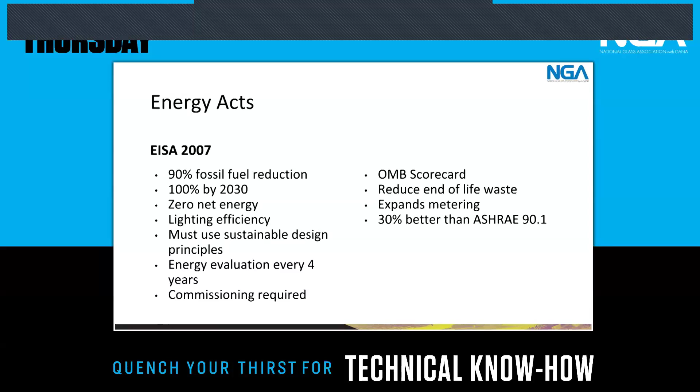The other one that we have out there, fairly new, is the Energy Act of 2020. It goes on to promote carbon management, looking at how we do both operational and embodied carbon. It expands that definition of zero net energy. We have a requirement for using performance contracting. Everyone here familiar with ESPCs, Energy Service Performance Contracts?

Energy service performance contracts is where basically an owner who doesn't have enough money to renovate their building or upgrade it can go out to the marketplace, and there are companies out there that will loan the money to the government or to the owner. They come in and look at all the possible retrofits that can be done, usually centered around energy and water efficiency. They say, okay, we'll spend $20 million renovating your building, we think we're going to save that in 15 years. You pay us back this plus a fee over those 15 years, and we guarantee your energy efficiency will be this. So they're essentially getting paid back by the efficiency they've brought to the building.

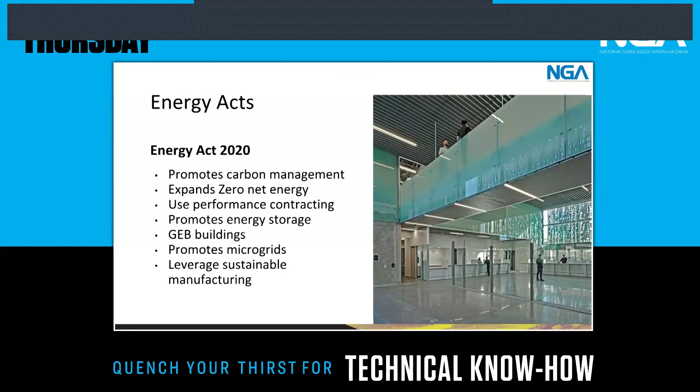So that's an interesting one we've seen happening more: using microgrids. So we're looking at the ability of our buildings to start to stand alone and be more resilient, as opposed to having to be part of these bigger electrical grids. And then really starting to leverage more sustainable manufacturing - how are these products being made and being delivered to the site?

So out of this concept of having to design to sustainable design principles came the sustainable guiding principles. And so these principles start to lay out that next layer of requirements that are put onto federal buildings. The most important, as an architect, for me at least, is employing these integrated design principles.

It was a great point earlier today that a lot of times people involved with the facade aren't brought to the table in time, and decisions are being made about the facade that then affect the overall energy efficiency of the building. This idea of integrated design brings more of those people to the table at the right time so that they can bring those ideas together, be bold in their thinking, and make those decisions up front, as opposed to later when the cost potentially goes up.

Other things you've probably recognized: energy performance, water conservation, indoor environment, the environmental impact of materials, and building resiliency. For the federal government, you obviously want most of those federal buildings to be highly resilient, because if you're in an area that might have something happen, like a wildfire or a hurricane or a flood, you generally want FEMA up and running so that they can then distribute the money and get help where it needs to go. So resiliency is a very important aspect of this.

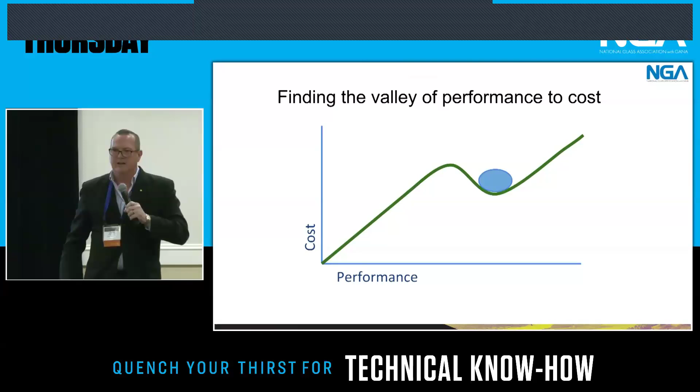Obviously, improving the building performance, health and comfort of the occupants. And then, so this is where integrated design comes in. This is where I want to build up from your talk earlier today, Helen - this idea of cost and performance.

She was absolutely right. Generally, when you raise performance, it generally is raising cost. But you do get to a magical point if you raise the performance enough and you have all of these integrated systems working with each other, that your cost actually starts to go down. Because you've taken a high performance facade and integrated it with the HVAC system, now the HVAC system doesn't have to be as big or as bold. I can reduce the cost of my HVAC system. I've integrated it with my lighting, so I don't need as many lights or as many fancy controls throughout the building. All of a sudden that cost starts to go down, because now I'm taking stuff out that I don't need anymore since my performance has gotten me up higher. This is where we try to live in the federal government, where that blue circle is - our costs are lower, but our performance is higher. Eventually, you do get to a point where you're leading edge, trying out some crazy new stuff, and that cost starts shooting back up again. But we're trying to live in that valley right there.

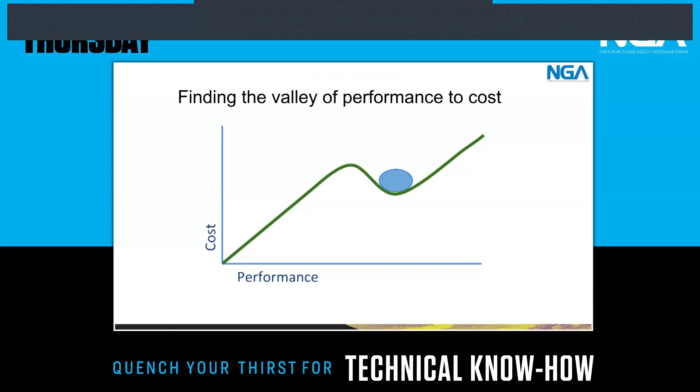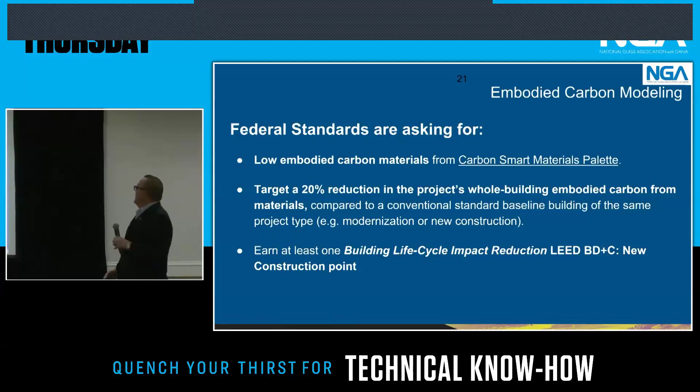Some of the aspects I want to make sure y'all understand - I know yesterday there was a lot of talk on embodied carbon. We require that our projects look at doing a 20% reduction in embodied carbon. So we do a whole analysis of the building - what are the materials being specified, how are they used, what is their footprint, and can we reduce that footprint by 20%?

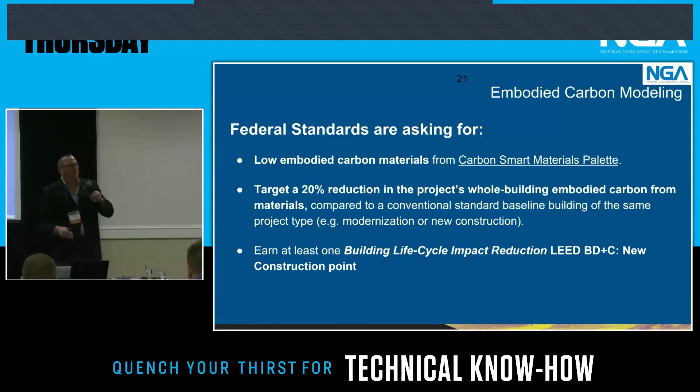Look at simple tools that are out there, like carbon smart material palettes. If you've heard of Architecture 2030, this is a shoot-off of that. It's basically saying, here are some real simple materials to take a look at and make consideration of - glass is in there. And then looking at using tools that are already out there, like the LEED rating system and some of the points they have in relationship to that.

I'll also note, I meant to put a picture in and I didn't - Edith Green Wendell Wyatt is in Portland, Oregon, and it's a phenomenal facade story. This was a brutalist style concrete building, thick concrete walls, strip windows, not a very nice place to work. They stripped off that concrete and put on a beautiful facade that's different on all four sides because it has to respond to the sun on all four of those sides. And in the process, getting rid of that concrete over 18 stories added 1.5 feet of rentable square footage around the entire perimeter of the building.

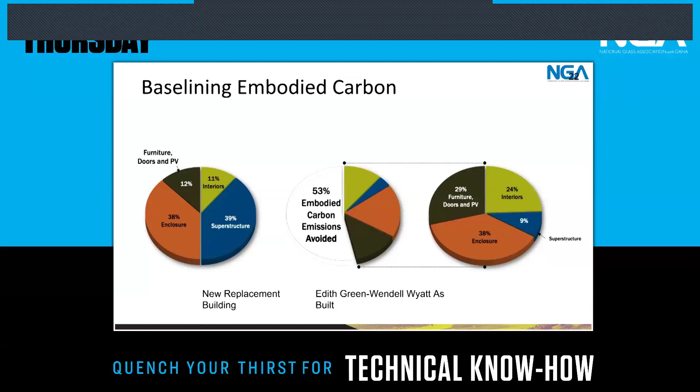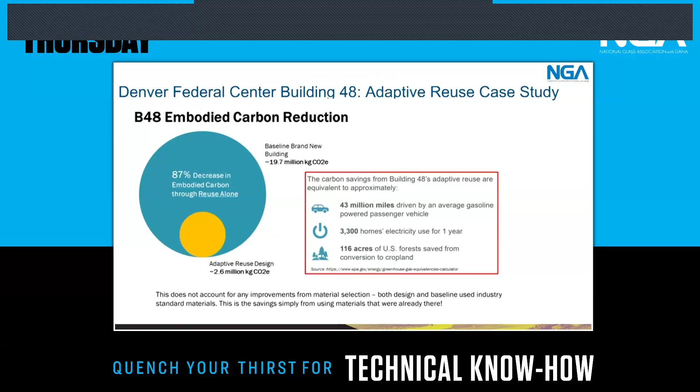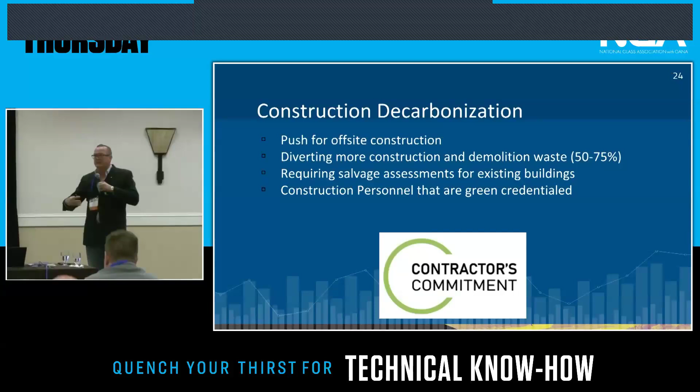Another aspect we're starting to see pick up in the industry is this idea of construction decarbonization. I bring this up for a couple items - mainly starting to look at pushing construction off-site, having more construction done in factories where any waste can then automatically be reused or salvaged or taken care of. Making sure the quality of the work is the highest quality we can expect, that the glazers are actually putting all of the seals in the right way. Then delivering it to the site just in time so it can be craned up where it needs to go, be attached and go forward.

We're doing also a lot more from our construction and demolition waste, and also salvage assessment. We're recognizing, we're talking to more glass companies that say, hey, you're taking off 1 million square feet of glass when you're doing this renovation - we'd really like that glass back so that we can then lower our embodied carbon footprint, crush it up and melt it and make new glass with it. So those sort of stories help to lower that overall embodied carbon footprint, which we're really excited about.

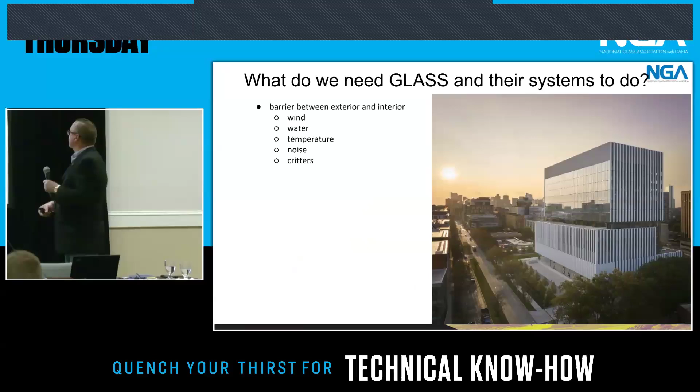So glazing requirements within all of this - we're asking glass to do a lot for us. This is sort of what we see in various facility standards out there. Some of this is obviously the basic requirement of what glass does, right? It keeps the wind from blowing inside and it keeps the water out, hopefully. It makes sure that temperature is regulated.

Piece here I want to take note of is life cycle costing. We heard a little bit of people talking about this earlier today. We're supposed to do life cycle costing on our buildings and projects. And I think one of the things I was thinking about - no one understands U value in the public. They understand R value because that's what they're hit with, right? So a window that's an R3 or 4, maybe a little better if you're really, really good, is really hard to justify when you're up against an opaque wall with an R value of 40. So we have to start asking our architects and mechanical engineers and whoever, is it really appropriate to have that window there? Because that's costing me money - that's costing heating and cooling, and it's generally more expensive than the wall that it's next to.

So we have to ask ourselves, is that really the best use of that glass and that glazing system? Is it really doing something for the building there? Life cycle costing - I push back on a lot of architects because they love doing repetition of windows, and all of a sudden I've got a window in a closet which I don't need, or I've got one in a restroom that they then have to black out. I was like, you're just spending money. Let's be a little smarter about this.

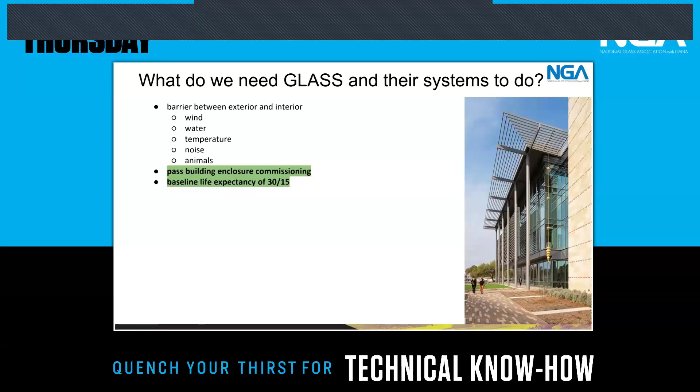We're also asking glass to deal with daylight. In a lot of cases we've gotten away from the concept that daylight just means a window someone can look out. I've got too many federal buildings where people installed umbrellas over their desks because the sun's beating down on their computer. They installed this big window and expected the agency to fund blinds to block out the bright glare coming in. So we've changed that—it's now all part of the designer's responsibility. They have to think about what they want happening on this surface, and how to design that facade with a blind, louver, or sunshade system. They have freedom to do that, but it has to be part of their package now. They can't separate it out and push it on the agency anymore.

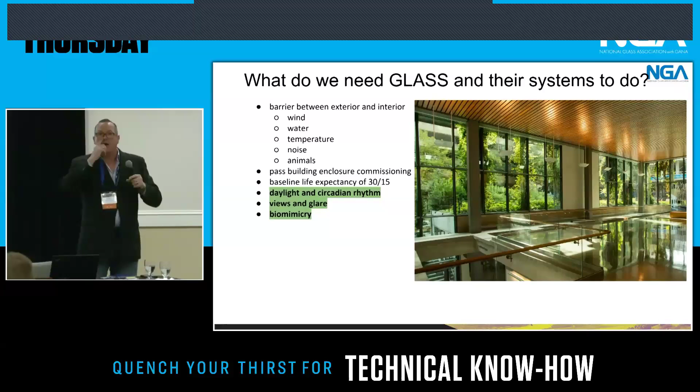Circadian rhythm—that's really a lighting thing, except it's not. It's all part of that daylighting aspect. We're now installing and working with labs to put in lights that change color throughout the day, to regulate people's circadian rhythms so they sleep better and are more awake at work. That takes daylighting to be a part of it as well. When the lighting and the facade work together to bring in this idea of circadian rhythm, we have a much better solution.

Biomimicry—this is actually an interior shot of the Edith Green Wendell Wyatt building. It has vines and trees growing up the outside of the building. It's pretty cool to see, and people really like this sense of biomimicry in this building.

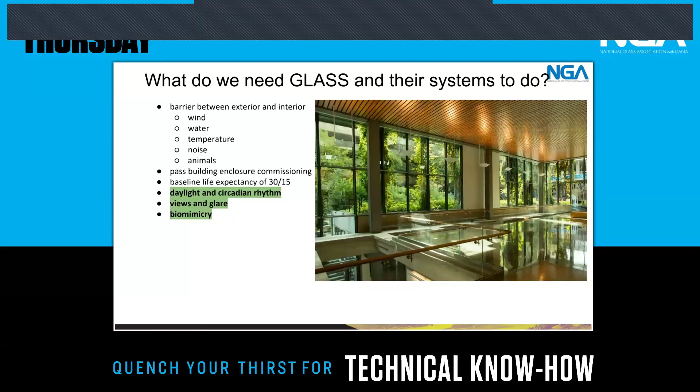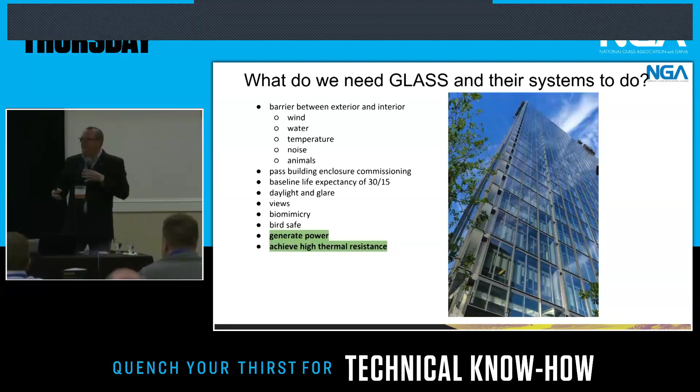We're also looking to potentially generate power. Is that an option? There's lots of new materials out there. On a 27-story building, it's really difficult to get all the solar panels you need on the roof, so where else can we integrate them? And then looking to achieve that high thermal resistance—really starting to understand the U-value of those materials. What's the new thing out there we can take advantage of?

There are programs for both military, Department of Energy, and GSA about new materials, helping them bridge that technological valley of death—where you invent a product but haven't gotten it all worked out and tested yet, it's not out on the marketplace yet. So let's use the federal inventory to install some of this. Let the national labs do extensive measurement and verification to see if it actually works, and write a report that, if it does work, you can use to get yourself across that valley of death. Hoping to bring more materials to the marketplace. I've talked with several of you—some are already in that program. Really excited to see how that works out for y'all.

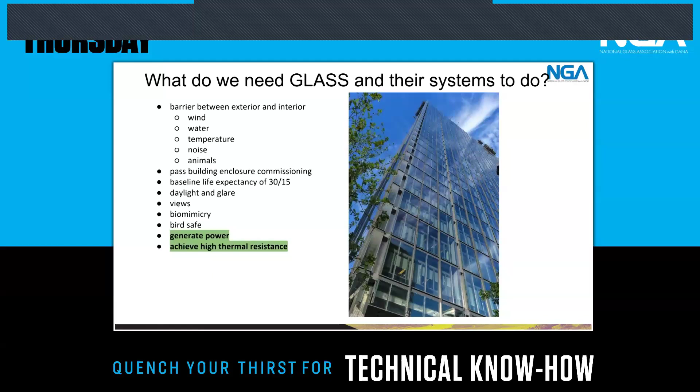And then also adding in security, including blast and ballistic. Anybody here involved in ballistic glazing? Raise your hand. Okay—massive issues right now with ballistic glazing. There's a very large study going on in the federal government because it's delaminating in way too many facilities on the northern and southern border. Something to be aware of—trying to figure out what's going on, what's making it happen. It's not the cleaning products, it's something else. When you own as many buildings that need ballistic glazing and you're having to replace it in less than 5 years, that's not good ownership for the American people. So that's something we need to really get a better handle on.

And then listening device privacy—we work with some three-letter federal agencies that want to make sure no one's listening into their conversations, so making sure the glass can take care of that.

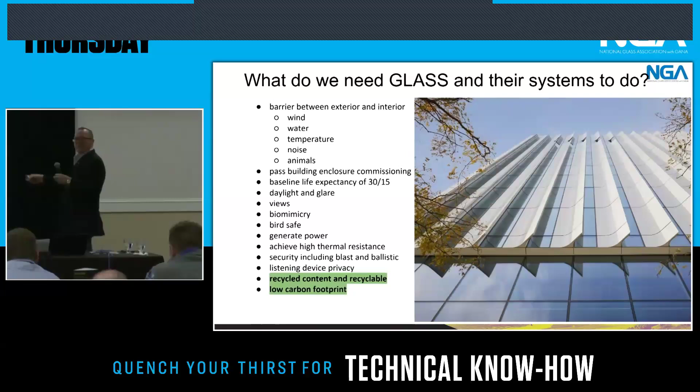And then starting to get into more recycled content and recyclable, low carbon footprint materials. Anybody got materials that can do all that for us? Yeah, there we go, I got a hand. All right, cool, that's what we're looking for. That's what the federal government wants. Some version aspect of that.

Oh yeah, sorry, and occasionally we also want glass for privacy and artistic expression, right? To do fun things like this on interiors.

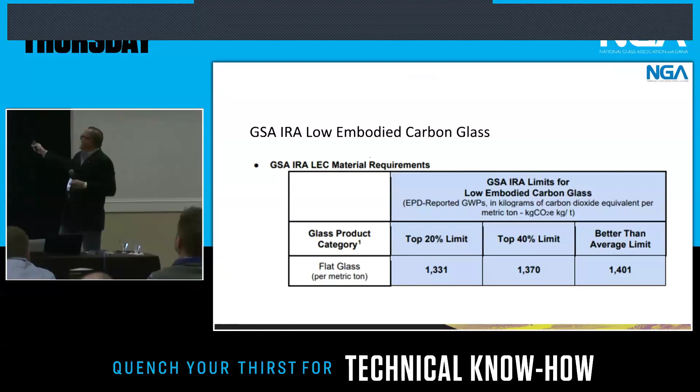So one of the things that, through the Recovery Act, the Inflation Reduction Act, is we really looked at what should be the embodied carbon for flat glass in relationship to the country, and what was available in the EPDs, environmental product declarations, out there. And we started setting limits as to where we're starting from. So our first and best case scenario, we're looking for flat glass whose EPD number is 1,331 kilograms of CO2 per metric ton.

And if no one can provide that, moving down in a tier. What's been really interesting about this is how the glass manufacturers, some of which are in this room, because I've been to your facility, have actually gone and looked at their process for how they were making glass and found ways to start to achieve this just by being more efficient and more effective in what they were doing.

And now they're able to provide products that are more in this range for our designers to start to specify. And so that's exciting when you start to see this sort of signal from the federal government and you respond and find better ways of manufacturing the products that you make.

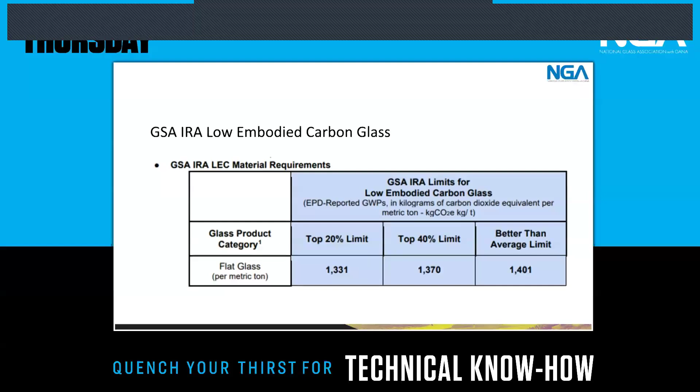Also, as part of this, we were requiring the facilities making the glass to have gone through the flat glass manufacturing plant EPI through the Energy Star program, the Energy Star plant aspect. So looking at how much energy they're using in a year, how can they be more efficient and effective. It's the Energy Star program, but it's set up for manufacturing plants.

So, future direction. All of this sounds great. Have no idea how much of this will stay, but this is where we are today. A few things that I think the National Glass Association needs to be very aware of, and this is the first one.

First week, this memo came out that talks about federal public buildings should be visually identifiable as civic buildings and respect regional, traditional and classical architectural heritage, in order to uplift and beautify public spaces and ennoble the United States. So right now, this is a memo. We're told that this will come out as an executive order with even more stringent language to it, but we're not sure. So we're only dealing with the memo.

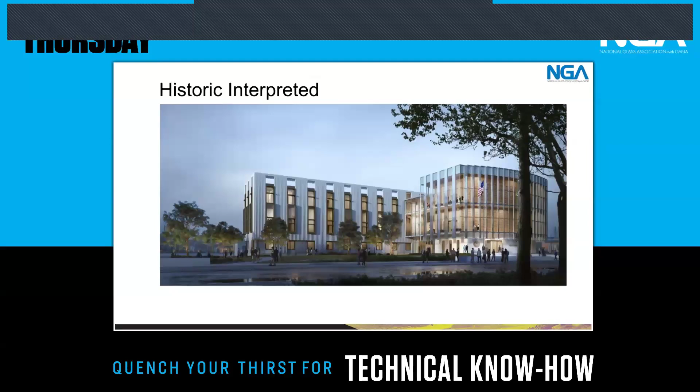So we don't know, but that's an area that certainly concerns me as a private citizen, sort of setting the architectural style of the federal government. And I think it's greatly limiting our designers and what they do in localities across the country. So maybe something that the association wants to say something about. And then finally, I think the other thing that's out there is EPDs are still a thing.

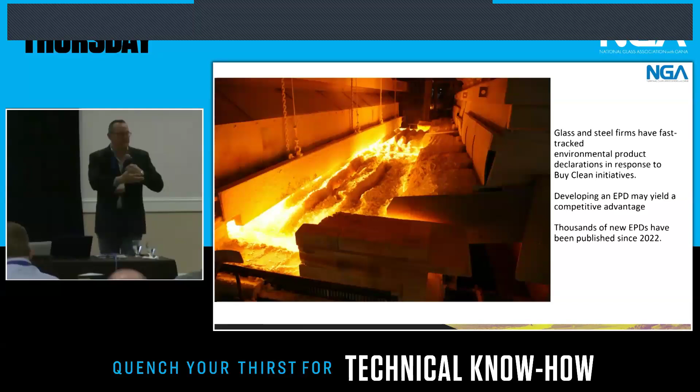One of the reasons we think EPDs will stick around is because they really push domestic products. That is a very big deal. We talked about that earlier with the tariffs and all of that. So if you're a local manufacturer in the United States, I know the association deals with Canada and Mexico and others as well, but in the United States, from a federal government perspective, getting materials from the United States is a very big deal. Having EPDs start to give you a competitive advantage, because generally if you can get an EPD and show a lower footprint, you're generally using materials from the United States and not dealing with all the travel of materials across the ocean.

We're seeing thousands of new EPDs coming out since 2022. We're finding lots of people out there willing to help, or for a price, help you get your EPDs done. And the industry is becoming much more knowledgeable about those PCRs, the overall setting of how you go about setting that EPD.

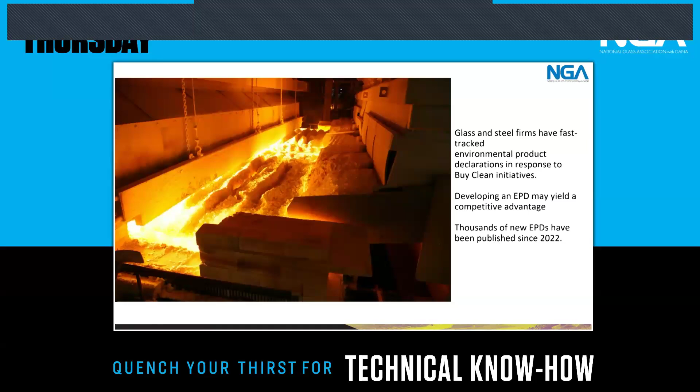So with that, hopefully that gives you a sense of where we're starting from and where we may be going. If you have any questions, that takes you to my LinkedIn profile and stuff like that. Got a couple minutes. If anyone has any questions, happy to answer as best as I'm able. If not, we can go on to the next thing.

I was just curious, how do you plan to enforce, or enforce maybe isn't the right word, the regional and readily identifiable portion that you highlighted on the one slide, of the design consideration? How does one interpret that? Because that seems rather nebulous and in the eye of the beholder.

Exactly, we're waiting for further guidance. We don't have any as of yesterday that I know of. And that's part of the concern. We don't know if an executive order is coming out on that, and what that executive order will say. More to come. Thank you, and this is an opportunity for people to express their concern about it, and let the powers that be know what we think about it.

Highlights, nice presentation, thanks for all that. Paul Bush from Feature Architectural Glass. One thing I had a question on, the whole EPD and global warming potential with the different categories of acceptance for the products is great. I was wondering, you didn't mention whole building LCA analysis when we get down into the nitty gritty of individual materials. Is there something coming in the future on that, or is that being put off for now?